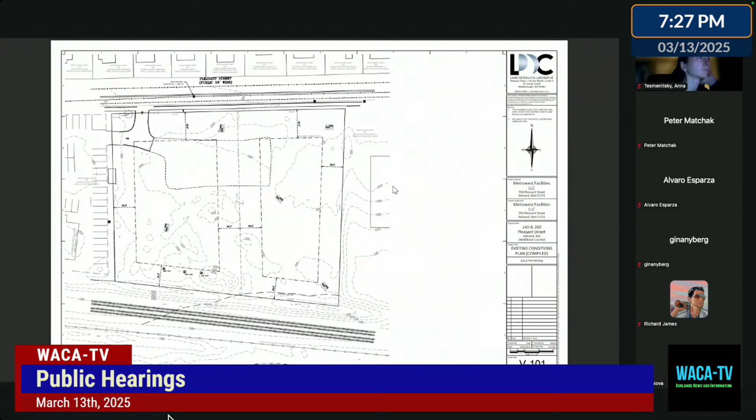The site is accessed actually to the northwest of the site. There's a paved exit to the site. So currently, Connect Church and Metro West use that as egress from the site. It's not an entrance as of this time, but they use it for egress. Alvaro, if you wouldn't mind going to the next slide, please. Thank you.

Just a question, just trying to look at the site from above. What is the building? So it's Connect Church, and then it's this treed area, parking. And what is the next building over? That's an industrial use. The name of it escapes me. That's the solar flare? And this is the weld, right? Okay. Just trying to get a sense. So if you're going down Pleasant Street, you have Worcester Air Handling, solar flare, and then the next one will be the weld, right?

I feel like I drive by this every day. It's actually kind of cool the way it's sort of hidden with the trees, and I'm sure he's going to talk about it. And it sounds like they want to replicate that. Absolutely. I appreciate the comments.

So one of the things that I failed to mention, as you folks know, this is part of why the overlay district was created. The Nyanza Superfund site is to the southeast of this, and the plume extends onto the property. DEP and the federal EPA have this on file. There are no activity use limitations on the site or any other restrictions that prohibit any construction on the site.

In the southwest corner of the site, there are 3 dedicated monitor wells, the 4 series, 4A, B, and C. They use these for monitoring the levels of the trichloroethylene in the aquifer, or in the plume. And what they've indicated in the study is that the levels are very low. It's down about 70 to 80 feet.

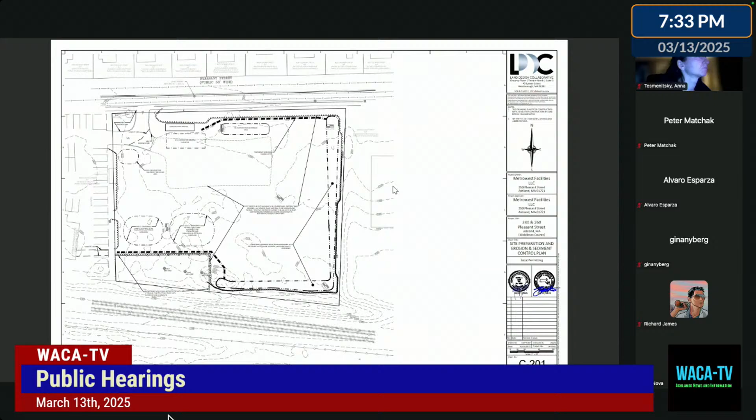So the parking, as Peter had read into the minutes, is ancillary to the existing uses. So basically they're generating another 19 spaces. They also wanted to create a recreational area for their students, so this is why we looked at a soccer field. Initially it started as just an open field, and at that point Jerry said, hey, why don't we just shoot for the soccer field? Maybe there could be multiple uses in town for youth soccer. Maybe we can work with the local league and provide them some opportunities to use the field.

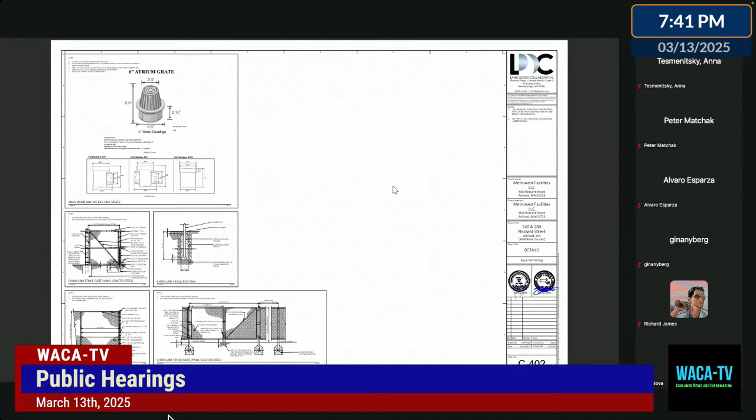Do we have any more here, Alvaro? So those are the details. If you wouldn't mind scrolling down, I think that's the detail. So this is traffic fire apparatus maneuvers. So while there isn't a building here, there are some instances we've seen cars on fire and the like. Typically on something like this, you're not going to need a ladder truck, but we wanted to demonstrate that a vehicle could easily maneuver through the site. So we took the biggest beast in the fleet, which would be the ladder truck.

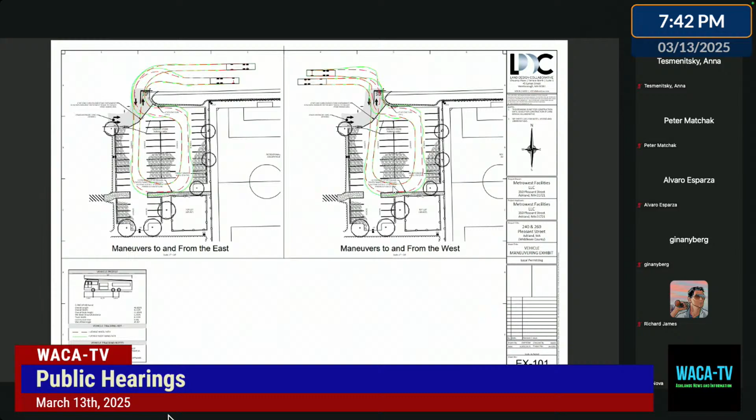And as you can see, coming into the site from the east, it takes the left into the site, can loop around the parking area quite nicely, and then take that right turn to exit the site. Likewise, coming in from the west, same type of maneuver in and out of the site, and then proceeds to go westbound.

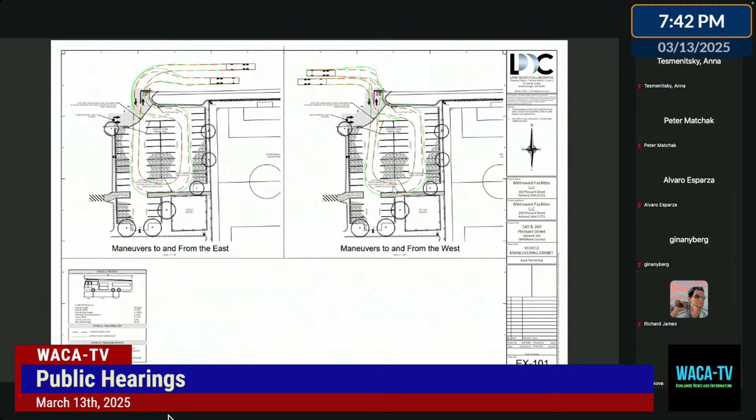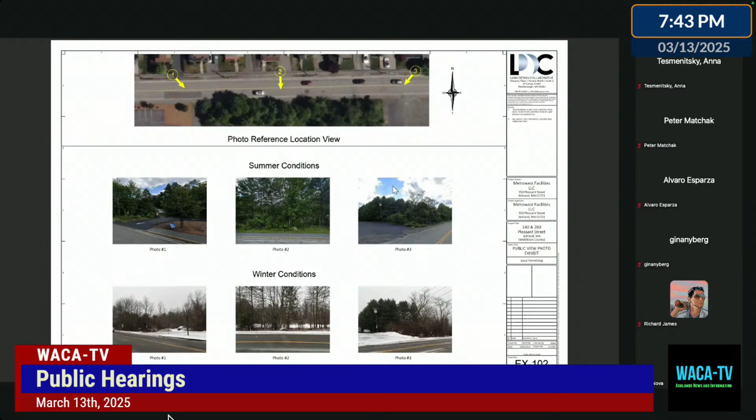And then Alvaro, if you wouldn't mind flipping to the next one, so this is an exhibit that's required in your zoning bylaw. It asks that there are some photos taken from the street to get an idea as to what it looks like. Now, I think it's disingenuous when consultants provide a board with photos of these lush conditions that you're going to see in summer from the street. Like I said, I think it's disingenuous. I want to see what does it look like in the winter? So what we did is we looked at 3 viewpoints, and provided you summer conditions and winter conditions.

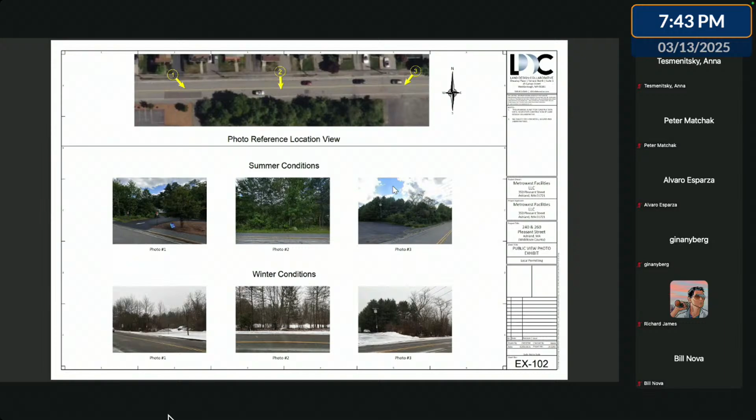And I will definitely open it up to questions from the board. Thank you for that presentation. It was really complete. Thank you. I can start out. Please, go ahead.

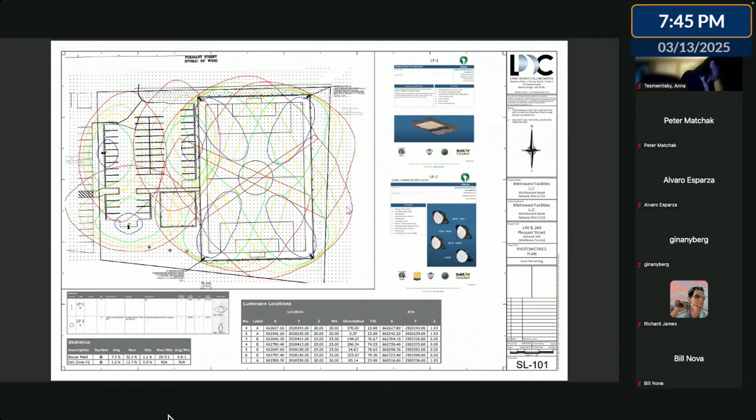I didn't get a chance to scrub and measure the scale, the distance from the railroad, because I know the railroad's particular, and I guess we should at least discuss that. Obviously, we're not doing the construction, but if we approve something that might not, you know, so I guess, what do you know about the railroad?

So the railroad, in terms of the track itself, they have a pretty, often a very large distance that you can't work, it needs special insurance, all of that. I don't know the scale on this, so. Yep, so looking at the uses elsewhere on the property, this is consistent with what is happening over at Connect Church. So in terms of the insurances, I would have to defer to, if you're referring to property insurance or assurance that there's nothing going to be. I mean, they call it railroad protective liability insurance.

Okay. I'm not saying that it's under our purview to ask for that. I think that we need to investigate. But I guess my concern for our board is if we're approving work within some zone of the railroad, do we have liability if we don't dot our i's and cross our t's about that? So I guess that's, yeah.

I'm not sure. I mean, I have had a project myself, we were actually just talking about it before the meeting, a residential project on the railroad in another town. And besides providing the railroad all this information about the project, there wasn't anything else that we needed to do. Obviously this is a little closer maybe than my project was, but I think it goes to, I don't remember the name of the organization, but it goes to them to review as well, if I remember correctly. Yep, so we have to put that on our list, I think, to find out.

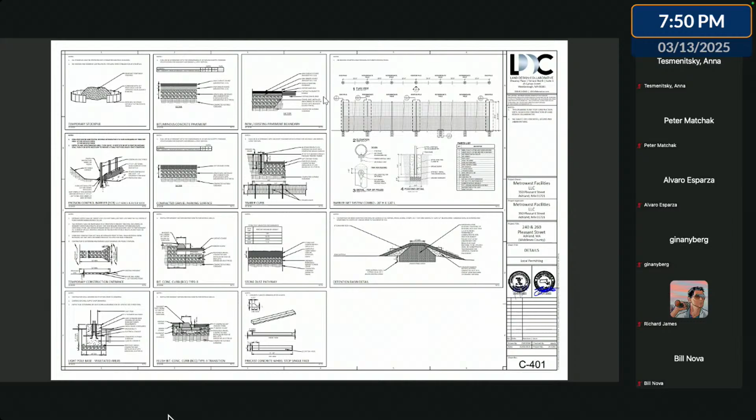Oh, so the screening itself, the soccer mesh, if you will, we'll call it the mesh, differentiate from vegetative, yeah. So with the mesh itself, it's going to be 20 feet high, and it's going to go to the far ends of the field. So it won't go around the entire field. The reason we're not doing that is we're going to need to have access to the stormwater basin. And we have a swing gate located along the edge of the fence to the south to allow access to the stormwater basin. The other thing that, and we have the fence, for entering the field, we have.

So which line up there is the mesh screen? Is it a solid line, is it a dash line? So that gray line there that you're pointing to? Yep. And there's one on the other side too, I see then? Yep, at the other end of the field. Okay, and then the long sides, it's just a regular chain link fence. But the parking lot side looks like it has that same mesh?

So, no, it doesn't. Maybe it's just the scale of the plan, but the parking lot side and the opposite side, so the east side of the fence and the west side of the fence don't have the screening. It's only the north and south side of the fence. Okay. Because that's where the errant balls are more likely to go. Yeah, it's just really hard for me to find a line up there that means mesh, right? So that I can actually understand the design of it?

Yep, so on the larger scale plan set, it's much easier to see. But like I said, I could probably highlight that maybe in a different color, so you folks can see it. Because it's not the thing you labeled UGE, right? No, that's underground electric. Actually, I should touch on that as well. Is it the, like, jagged edge on? That's it.

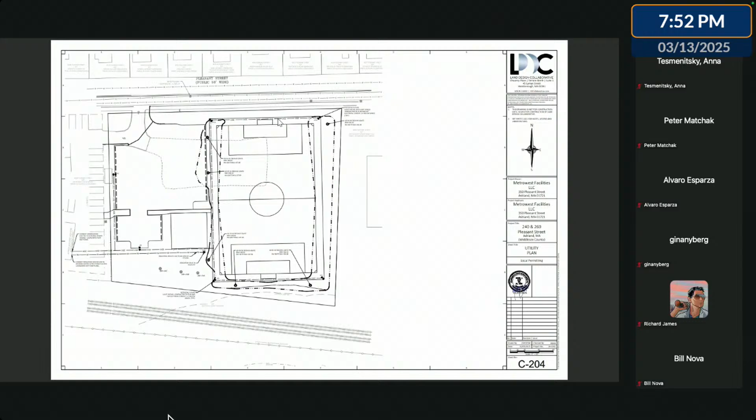Yeah, okay. So, my question is also about, not to harp on the soccer mesh, but as someone who spent a lot of time on soccer fields and is likely to spend a lot more on soccer fields, I am wondering about, to Kate's point about the railroad. Obviously, they'll have a special interest in making sure that there are not balls flying onto the tracks. So do we know whether this is acceptable to them, just the way that the orientation of the field is?

Obviously, you've got Pleasant Street where balls are gonna fly, you've got the tracks where balls are gonna fly. And then, you know, anyone who plays soccer knows that this tot lot is right in a corner, errant corner kick. You've got balls potentially flying into that playground. So I'm wondering if the railroad's okay and if there's any way to extend that screening to the playground. So just to, the reason for the orientation.

I played a lot of ball growing up, suffering for it now, but baseball, soccer. So soccer wasn't big when we were kids. But my kids have played soccer. I coach soccer. And there's nothing like a goalie being blinded from an east-west orientation. It's kind of like a baseball field. Playing baseball and then all of a sudden there's a fly ball and you don't see it. Been there, not nice. And so looking at this, we need to go north-south orientation. So I think, yeah, we've got the screening.

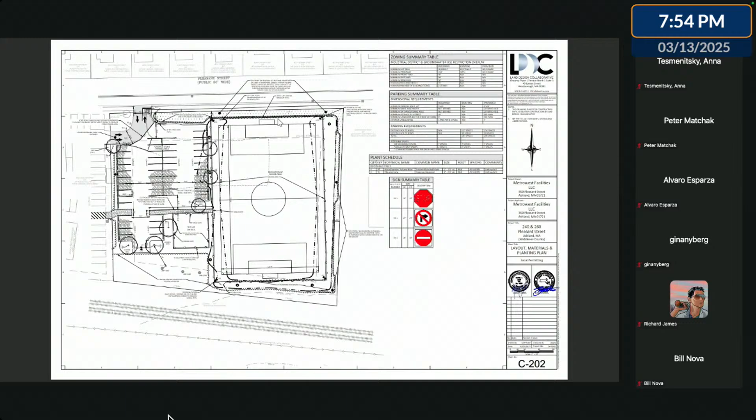Seeing that you have that lead foot, typically something like that, based on what you see, you know, not that I want you out there playing soccer with kids, U12, it could be humiliating for you. But at U12, how far, I mean, is another 20 feet up that sideline?

Yep. And so looking at that, that's kind of what we discussed with the town. So there are a couple other things that came up. The deputy fire chief had asked about, which I thought was a good question, access for an ambulance. So we're going to put a double swing gate out there and dedicate a space for access for the ambulance. So with that said, if we had screening around the entire field, then the ambulance wouldn't be able to get into the field. And to Alvaro's point, another 20 feet, as he said, based on his experience, would be sufficient. Yeah, I think it's a matter of putting what you need, but not going overboard with it.

Agreed. Right? It's almost like sign pollution. Yes. You see some folks that put up 50 signs from the stop sign another 100 feet. At some point, it becomes white noise.

Are there any trees that are retained, or is it being cleared? Yeah, so other than what's around the well area, anything that's between the parking lot, the existing parking lot and what we're proposing, we would look to save those trees. And we're looking to try to do whatever we can. So if you look at the proposed entrance, just to the east of that proposed entrance exit, we've maintained some screening in there. And like I said, we would look to enhance that with some of the shrubbery.

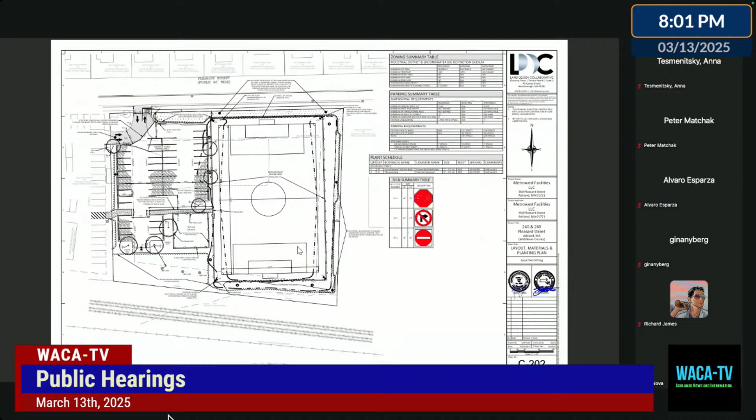So, like I said, looking at it from the soccer field to the east, there'll be some trees there along the property line. Honestly, are there going to be a heck of a lot? No. But there will be some trees retained. So other questions from the board? Yeah, I just think with everything we've been dealing with, trying to retain trees for shade. I'm not a soccer player, but it seems like sometimes you need some shade from all that sun. But on the other hand, I know that it can make the field a mess, right? So there's downsides. I'll leave that question up to others.

But this needs to go to the design review committee? Correct, yep. Who are very in tune to the landscape architecture department, the tone of things. So I would recommend, there were a few questions we had here. I think the railroad question isn't a question for the planning office, it's really a question for the applicant. But I think we should look at that and see what they required. I don't think we've had something built along the railroad since I've been here. So that should be understood.

But also I would recommend that if you have more information or can provide a colored rendering for the design review committee, if that's getting the landscape architect more involved to produce that, so that you really can understand. I realized I was on the wrong page, which is why I couldn't pick up on where that mesh fence was. But so you can really pick up what's green on here, what's gravel, and use color to help make that a little bit easier.

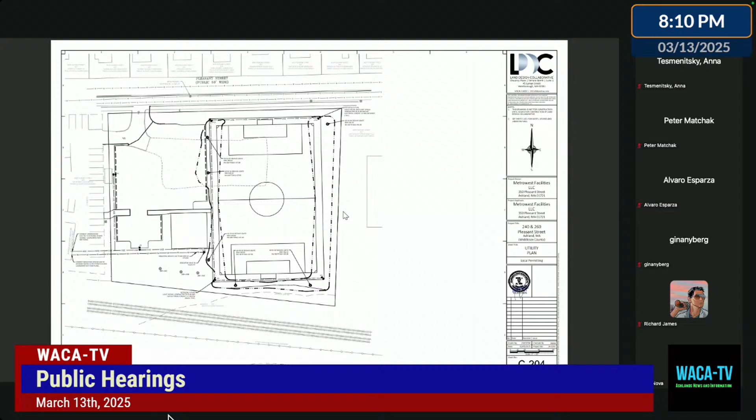Thank you so much for explaining that. But I think with this decision, though, we also need to think about the future. If lights go in, what is the trigger regarding time? When do lights go off? Daylight savings time in the fall, obviously the sun's starting to go down earlier, but it's still nice out, people playing soccer. What's the time limit?

So I think I would ask you and the applicant to start thinking about that. And obviously, there would be something in this decision that said you would have to come back to the planning board, and/or let's iron it out right now, and/or have conversations with the abutters across the street to see what is acceptable. Because what's acceptable for the town, for you, and for the abutters may be three different things. But I think we have to come to a consensus to find a time frame which works for everybody.

And I just want to float that out there tonight rather than later, because it is important regarding time, which rolls into the question of noise. Obviously, this is a soccer field; it's not a pickleball court, but you still have to put it on the radar right now.

Good call, Peter. There might be last comments from the planning board, but before we do, I'd want to open up for public comment. So if there's anyone in the audience here, or anyone online, raise your hands and make yourself known. Forgotten that you were hanging out in cyberspace. I'm good. Robin, you can come up.

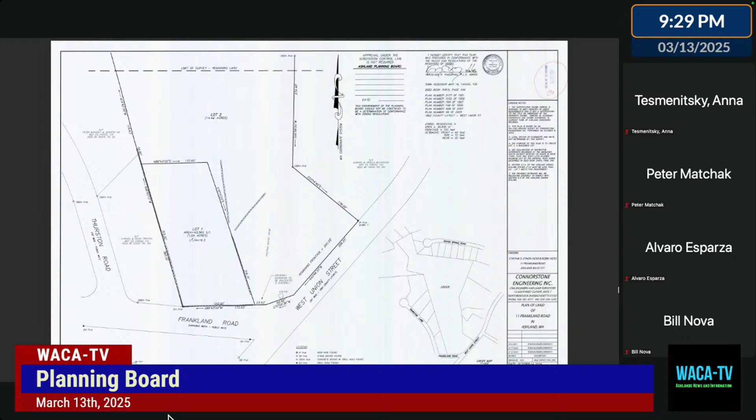I know I've been up there, but it was a long time ago. Christmas season, I think it was. Come up anytime. I tell everyone to come up and feed the horses and the goats.

Okay, yeah, I mean, it seems pretty straightforward. Obviously, it's a very regular shape for a lot. So, does anyone have any questions? Sure. I make a motion that I approve, approval not required plan, for 11 Frankland Road. And are there any further questions? Anna, any questions? No, I'm good. Okay. Sorry, I keep forgetting that you're there. No worries. I can always raise my hand. Okay, all right, roll call vote then?

Deepa Venkata. Anna Tesmenitsky, aye. Catherine Jersey, aye. Amanda Hayes, aye. And Tricia Kendall, aye. All right, sorry to make you wait all that time. No, that's okay. Thank you for what you guys do for no pay. So Robin, the planning board, after the meeting, will sign this. Yeah. Tomorrow I'll scan it, and then you can pick it up at any time and take it to the registry. Okay? All right, got it. Thank you.

Okay, so now we're going back to Item 6, which is the review of the 20 Ponderosa Verizon wireless equipment upgrade decision. Thank you, and that's under what number in our, number 1, okay. Thank you. So this was pretty standard, I think. You said there was one line eliminated, that was from an older version? Yeah, Kate did send me a couple, I think there were 3 tweaks overall. One was a reference to a water tank. Obviously, it was a leftover from a previous decision.